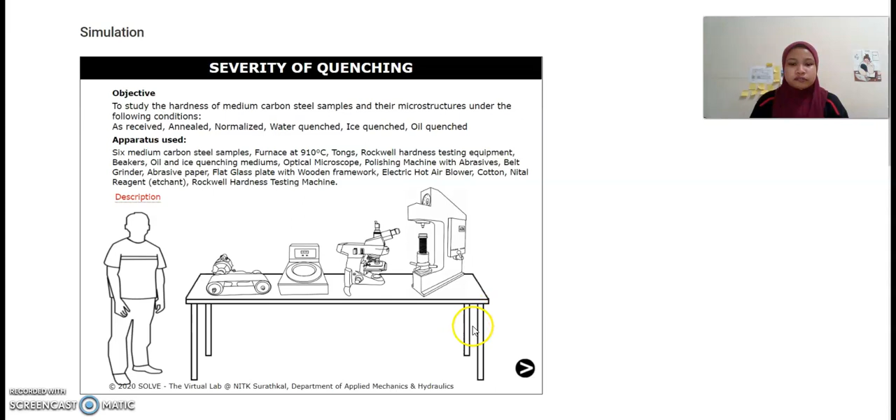Step 1: Obtain 6 identical samples of medium carbon steel and keep one sample aside as the control. Step 2: Austenitize all 5 samples for 30 minutes at 910 Celsius.

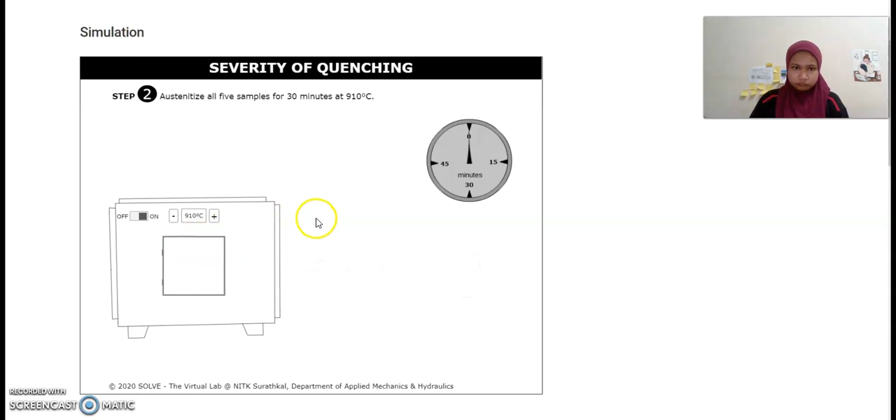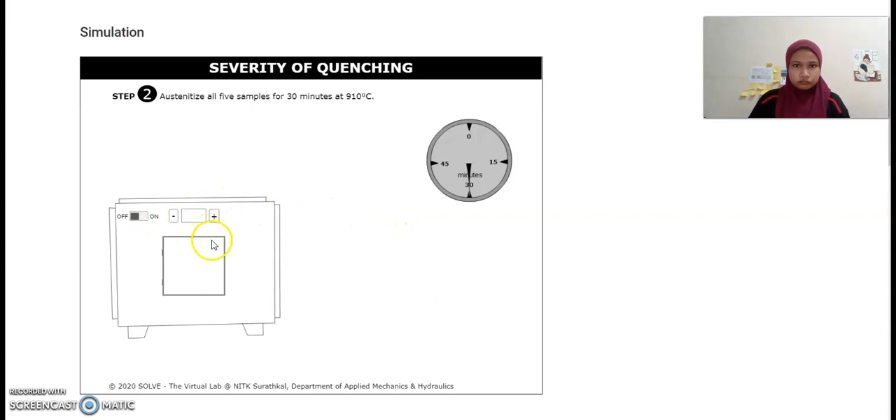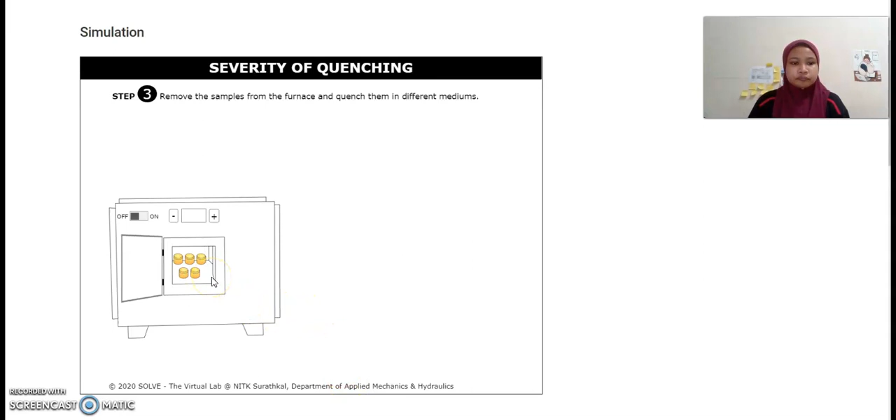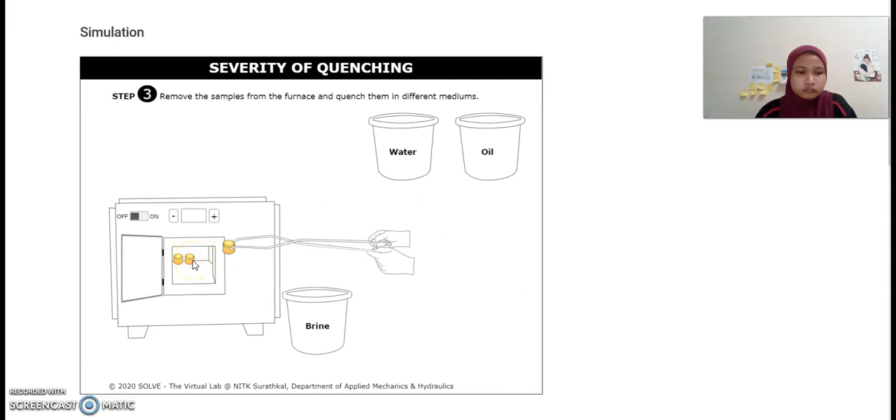Step 3 is to remove the samples from the furnace and quench them in different mediums. Let the last sample cool in the furnace till 400 Celsius.

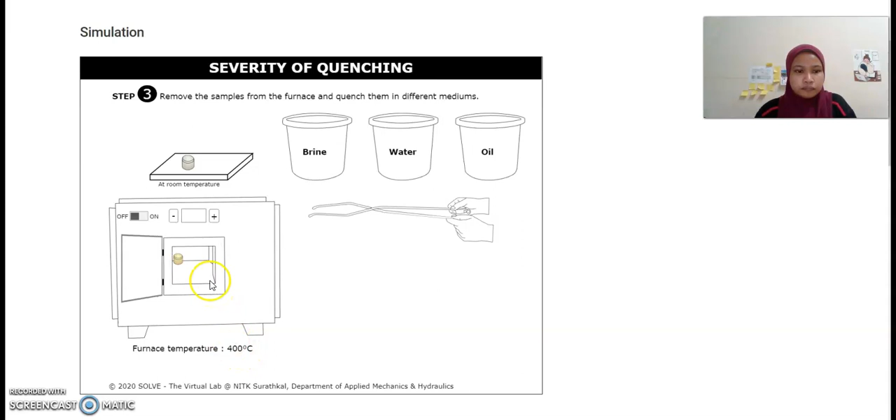Once all samples are cooled to room temperature, each sample is polished and the microstructure is observed under the microscope, as shown in the subsequent steps.

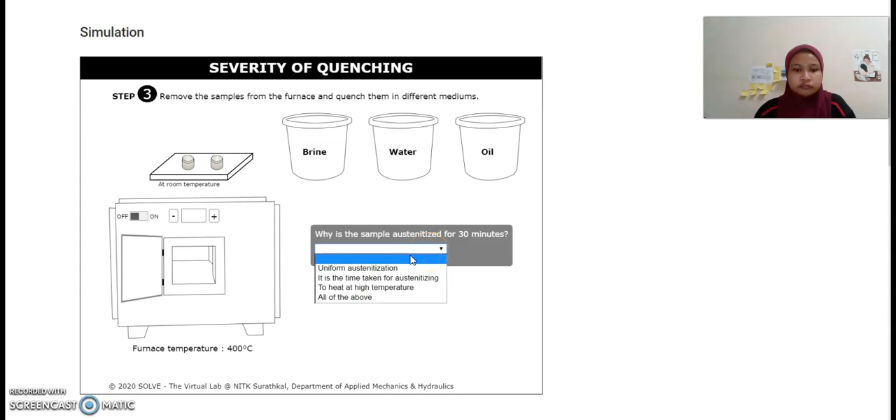Step 4 is to obtain a flat surface on the specimens by grinding.

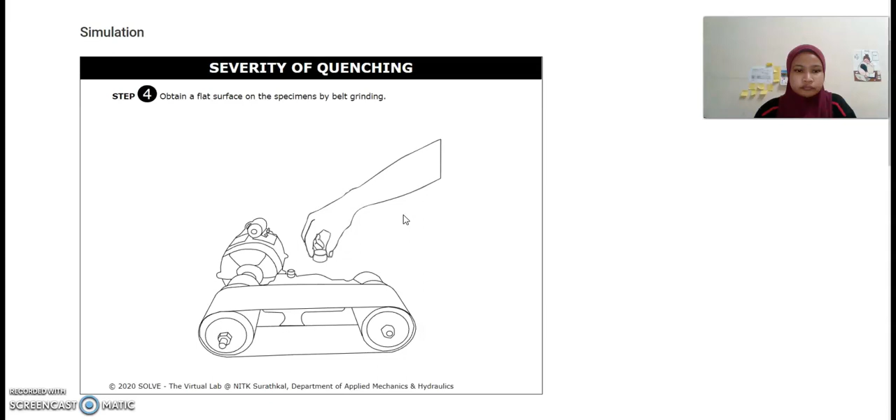Step 5 is to support a polishing paper of 1/0 fineness on a flat glass plate. Polish the specimens by rubbing in a forward direction only.

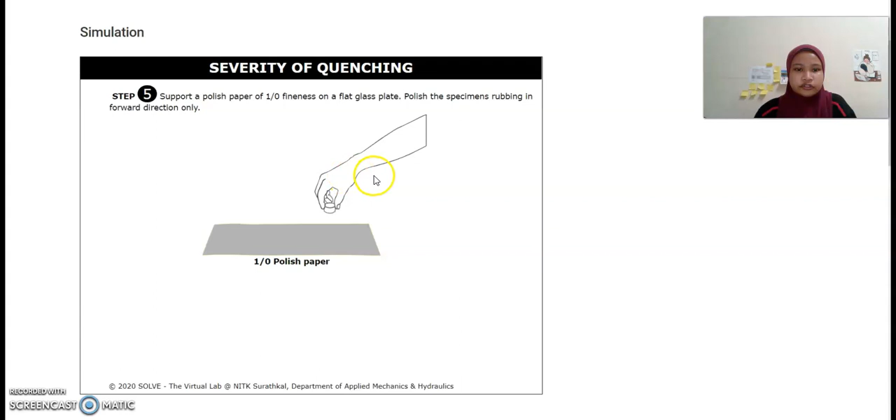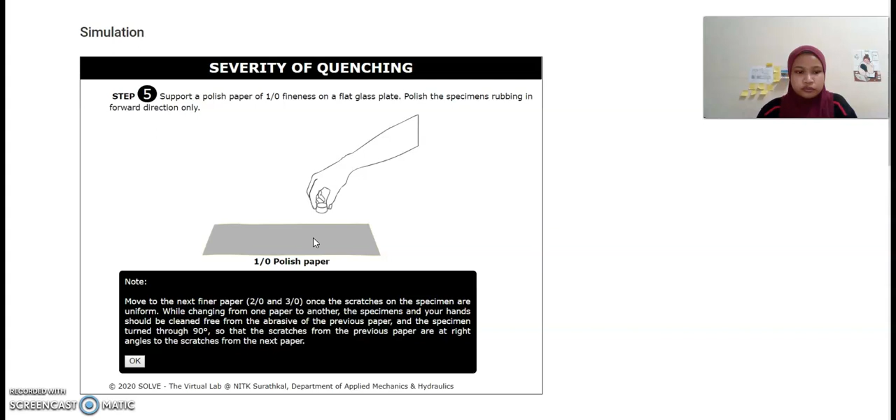Move to the next finer paper, 2/0 and 3/0, once the scratches on the specimen are uniform. While changing from one paper to another, the specimens and your hands should be clean, free from the abrasive of the previous paper, and the specimen turned through 90 degrees so that the scratches from the previous paper are at right angles to the scratches from the next paper.

Step 6 is to finish polishing the specimens on 4/0 abrasive paper. Wash hands and specimens.

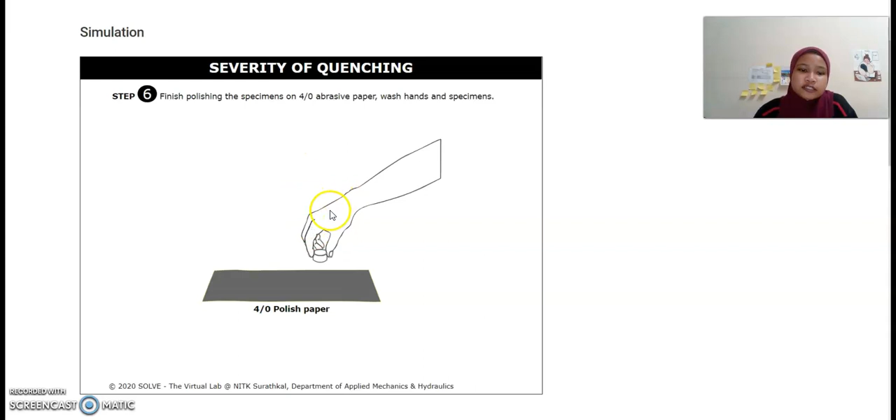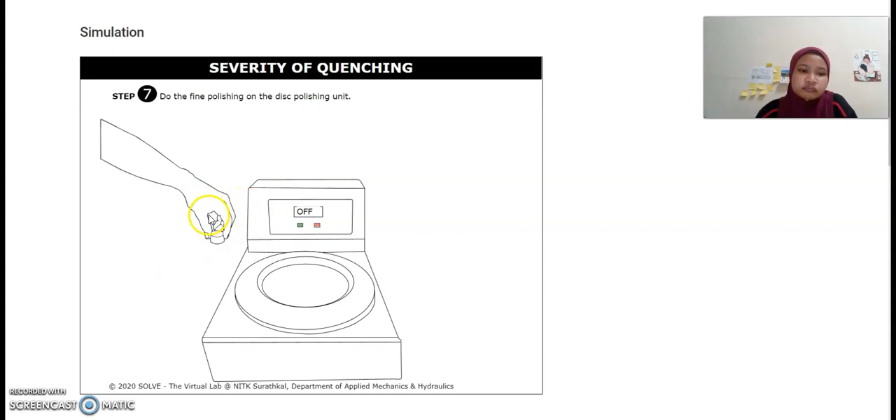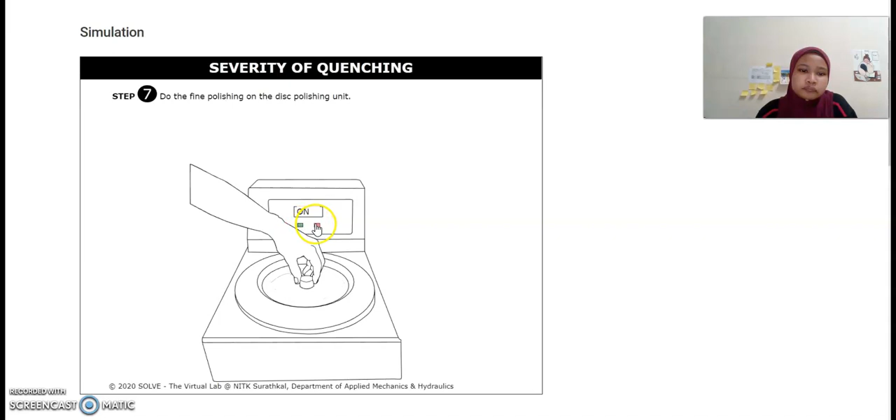Step 7 is to do the fine polishing on the disc polishing unit. Switch on. Switch off. After fine polishing, clean off the polished surface of the specimens with water and dry it with an electric hot air blower.

Here I want to continue the step. Step 7: do the fine polishing on the disc polishing unit.

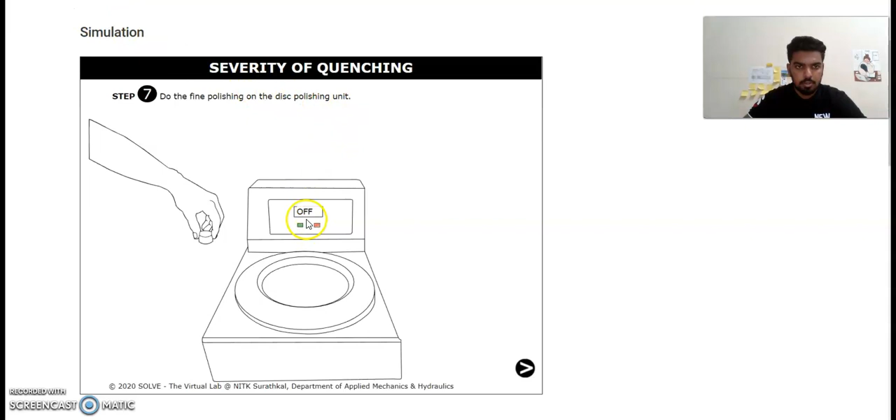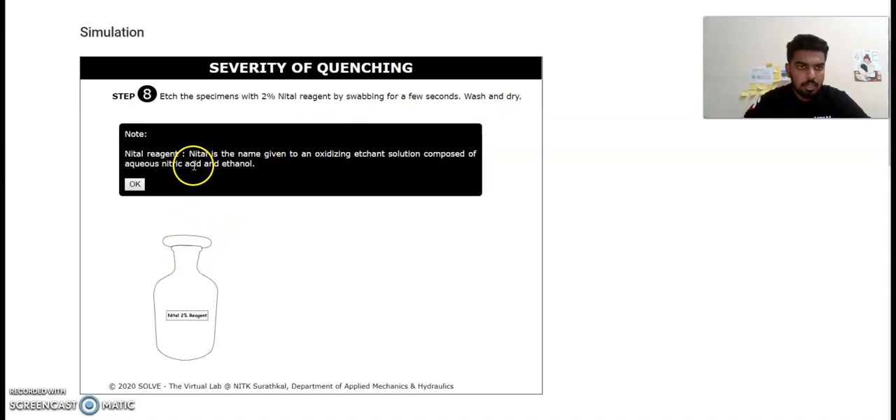Step 8: Etch the specimen with a 2% Nital reagent by swabbing for a few seconds. Wash and dry. Nital is the name given to an oxidizing etchant solution composed of aqueous nitric acid and ethanol.

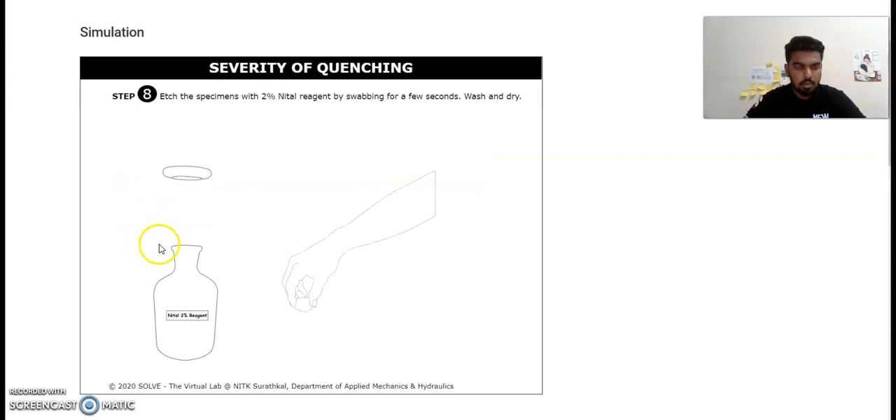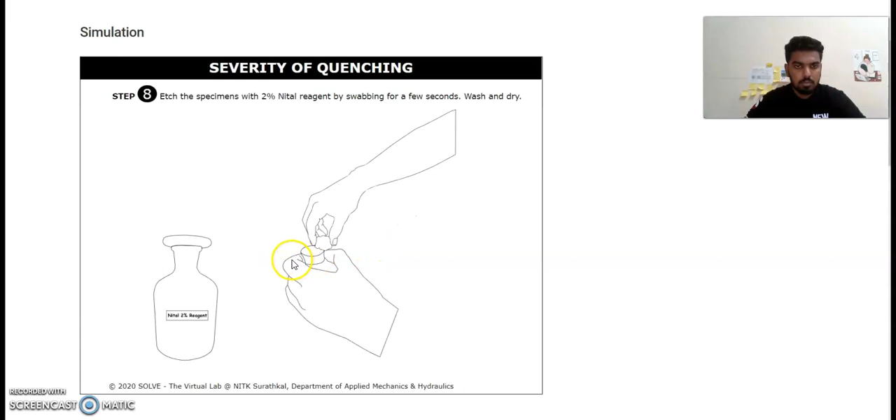We go to step 9: Examine the specimens under the microscope and observe the structural features.

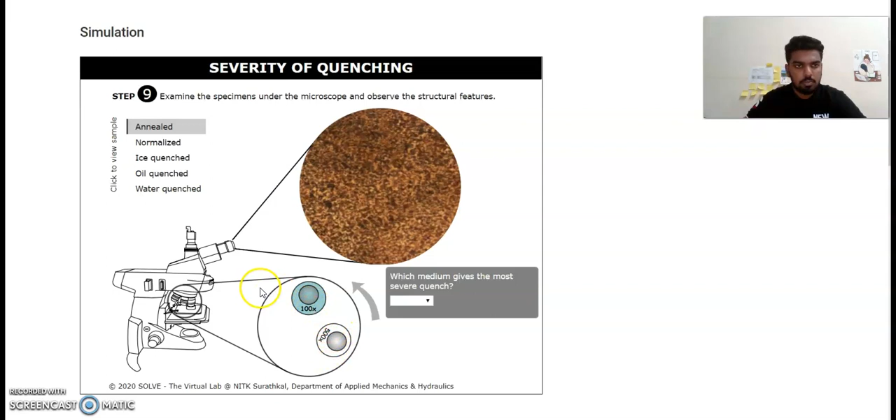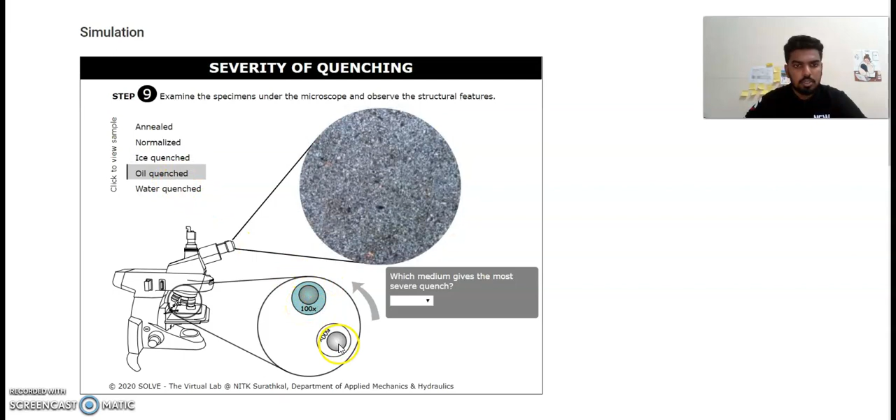Annealed, 100 and 500 times scope. Normalized, 500 and 100 times scope. Ice quench, 500 and 100 times scope. Oil quench, 500 and 100 times scope. Water quench, 500 and 100 times scope.

Which medium gives the most severe quench? Ice brine. Okay.

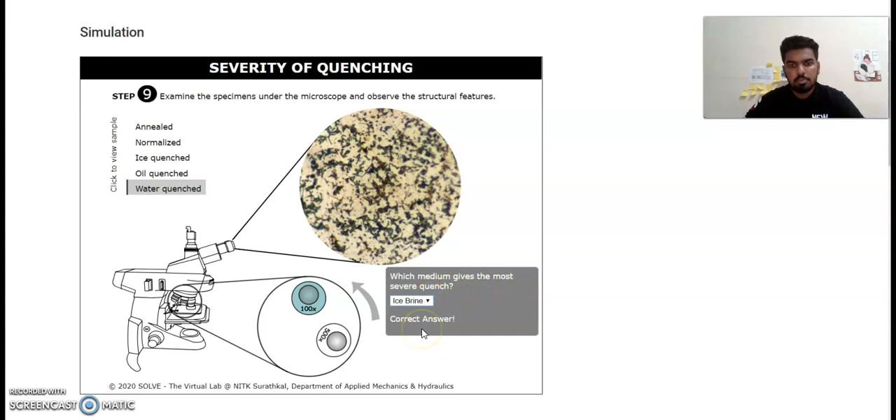Step 10: After noting the microstructural features of the samples, perform the Rockwell hardness test using the cone indenter for all 6 samples: control, annealed, normalized, water quench, ice quench, oil quench. This is the cone indenter.

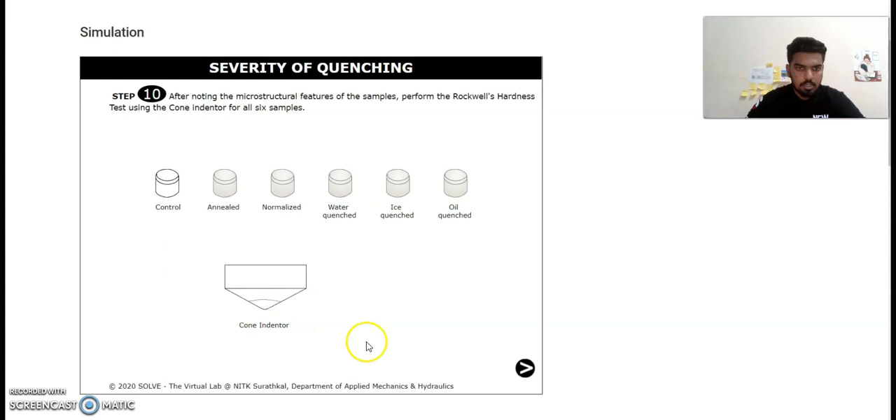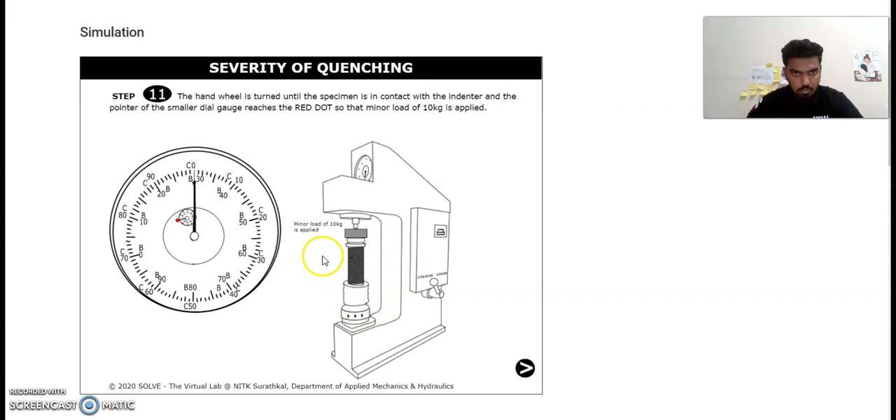Step 11: The hand wheel is turned until the specimen is in contact with the indenter and the pointer of the smaller dial gauge reaches the red dot, so that a minor load of 10 kg is applied.

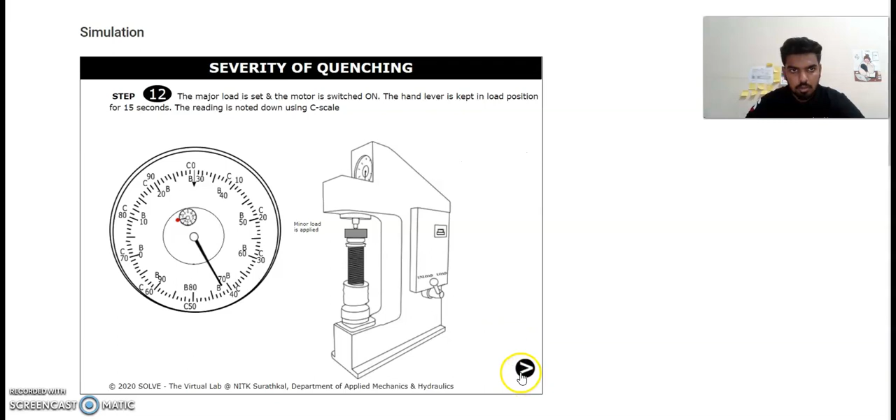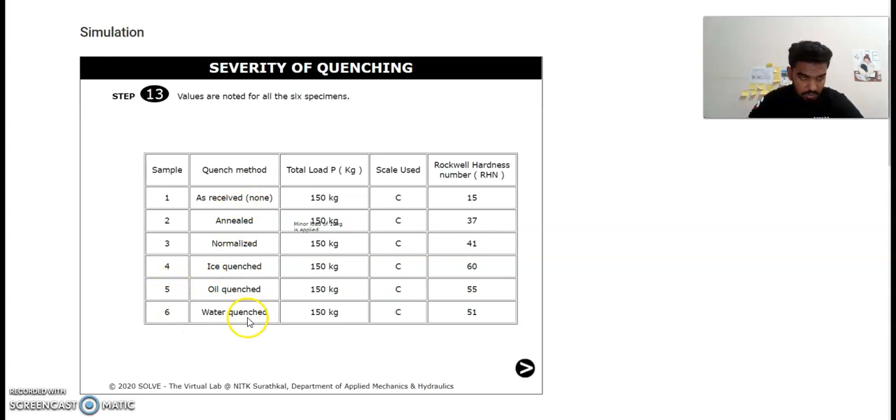Sample 4, ice quench, total load 150 kg, scale used C, Rockwell hardness number is 60. Sample 5, oil quench, total load 150 kg, scale used C, Rockwell hardness number is 55. Sample 6, water quench, total load 150 kg, scale used C, Rockwell hardness number is 51.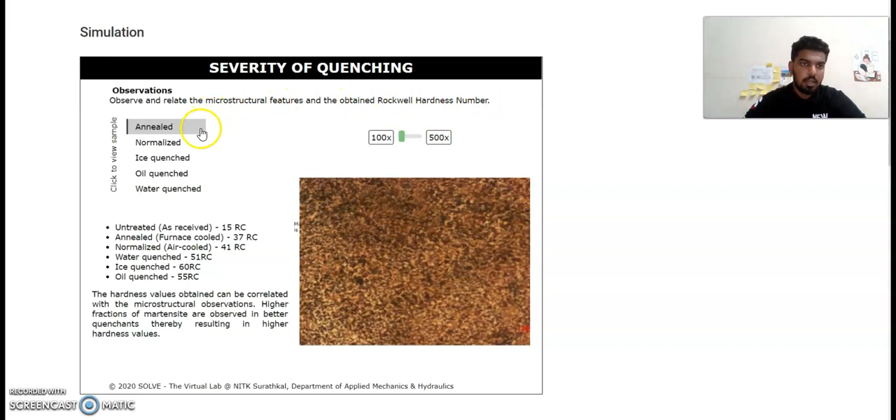Observation: observe and relate the microstructural features and the obtained Rockwell hardness number. Annealed: 100 and 500 times. Normalized: 500 scope to 100 scope.

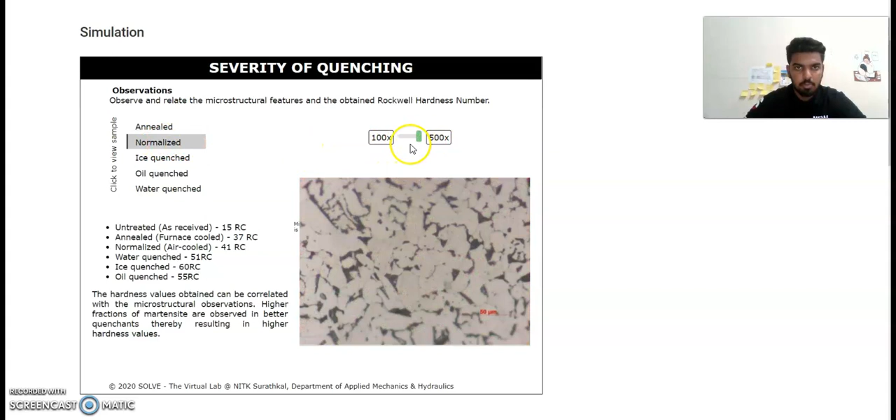Ice quench: 100 scope to 500 scope. Oil quench: 500 scope to 100 scope. Water quench: 100 scope to 500 scope.

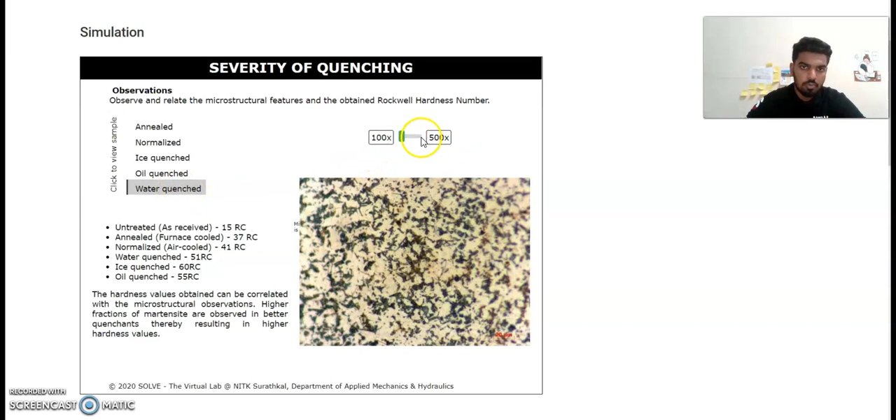Untreated is 15 RC and annealed, furnace cooled, is 37 RC. Normalized, air cooled, is equal to 41 RC. Water quench is 51 RC.

Ice quench is 60 RC. Oil quenched is 55 RC.

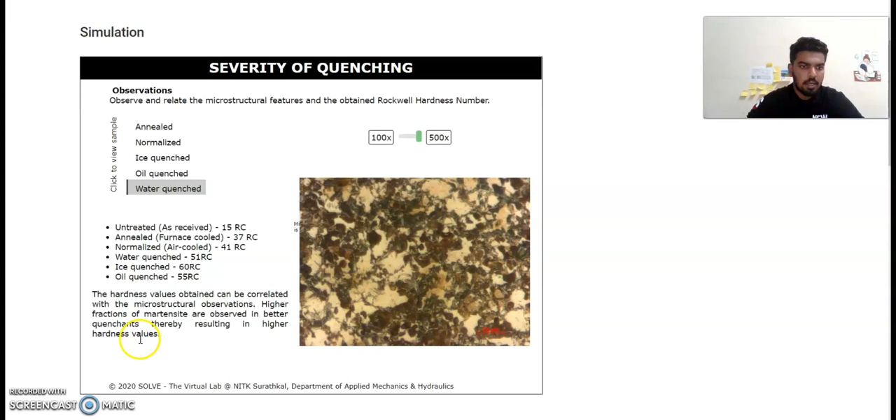The hardness values obtained can be correlated with the microstructural observation. A higher fraction of martensite is observed in better quenchants, thereby resulting in higher hardness values. So thank you.